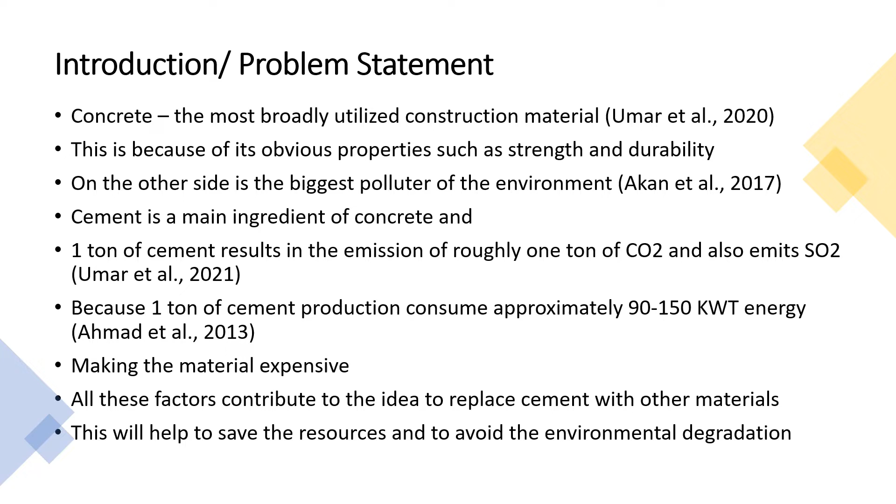And therefore, researchers are trying to investigate and adopt different alternative materials which could be not only environment friendly but can also reduce the cost of concrete. So if we look at the example of China and India, they are the world leading producers of cement, but at the same time they are also the leading environment polluters in the world.

Because the earth's population is increasing, the cement demand will double in the next 30 years. So if we adopt some supplementary cementitious material, we can not only meet our cement requirement, but we can also reduce energy and CO2 emissions, and we can thus protect our environment.

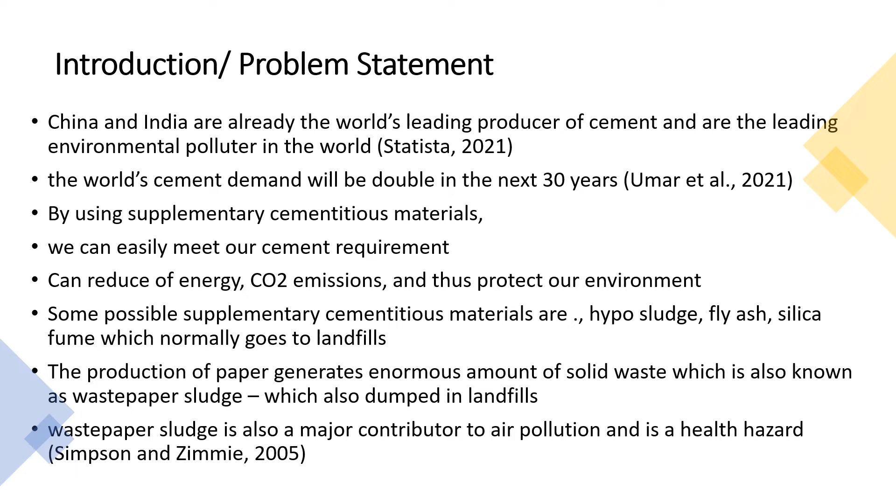There are several materials which have cementitious properties, and one of them is waste paper sludge. Waste paper sludge normally goes to landfill, and it is also recognized as one of the major contributors to air pollution. Paper sludge is classified as a class 2 liquid alternative fuel, and if it is burned, the fly ash has the same properties as Portland cement.

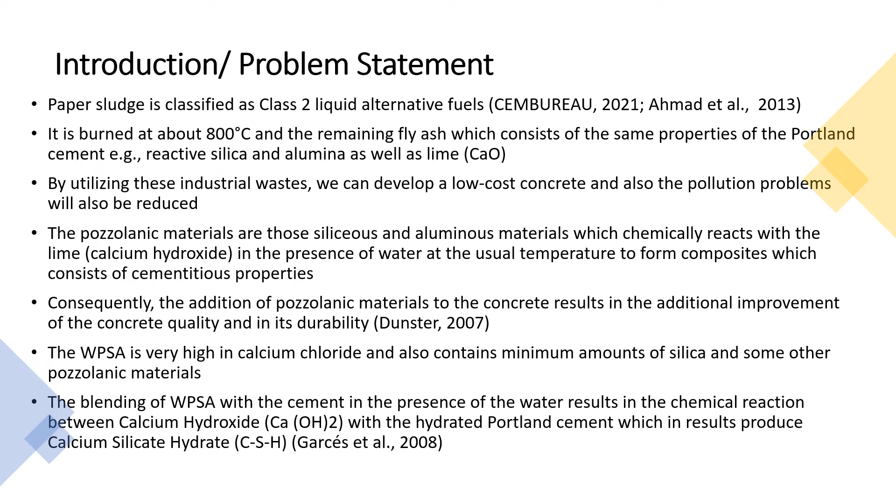And if we utilize this fly ash, we can produce low cost cement which can also be environment friendly. The reason for that is that the waste paper sludge ash is very high in calcium chloride and also contains a minimum amount of silica. So the blending of this ash with the cement in the presence of water results in a chemical reaction between calcium hydroxide and the hydrated Portland cement, which produces calcium silicate hydrate.

So we have used that ash powder in concrete to see its performance. M30 concrete was made with different percentages of paper waste, from 0 to 40%. Ordinary Portland cement was used in the experiment, and the waste material, the ash, was obtained from the University of South Wales. Here in the table, you can see the composition of the cement and the hypo sludge which we have used in our experiment.

For example, if I just look at the first item, the lime or calcium oxide: in cement we have 62%, and the waste material which we have used has 46.2%. So it's not quite equal, but roughly they have the same content.

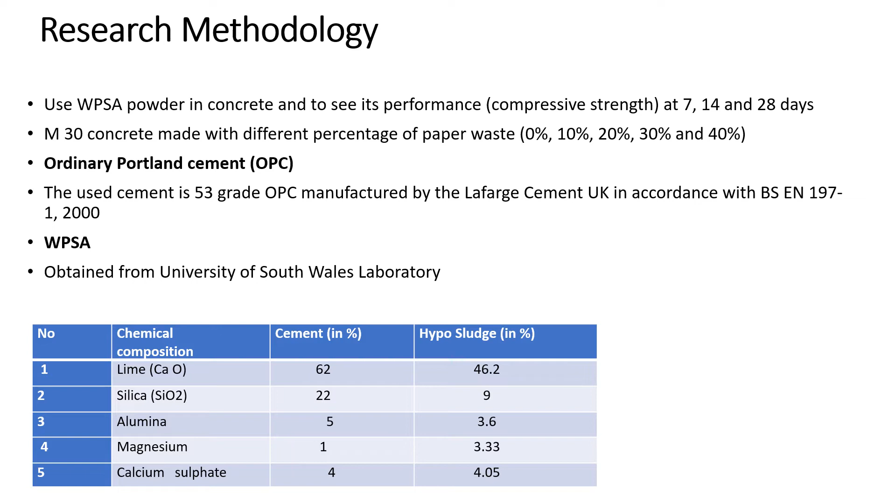So apart from using Portland cement and the waste paper ash, we have also used coarse aggregate, fine aggregate, and water, which are the normal ingredients for concrete. We have produced and tested 50 cubes of concrete, 10 cylinders, and 5 beams. And the focus of our laboratory tests was on compressive strength, split tensile strength, flexural strength, and water absorption.

The water cement ratio to produce the samples was 0.6, and the samples were placed in a water tank for curing for the required number of days.

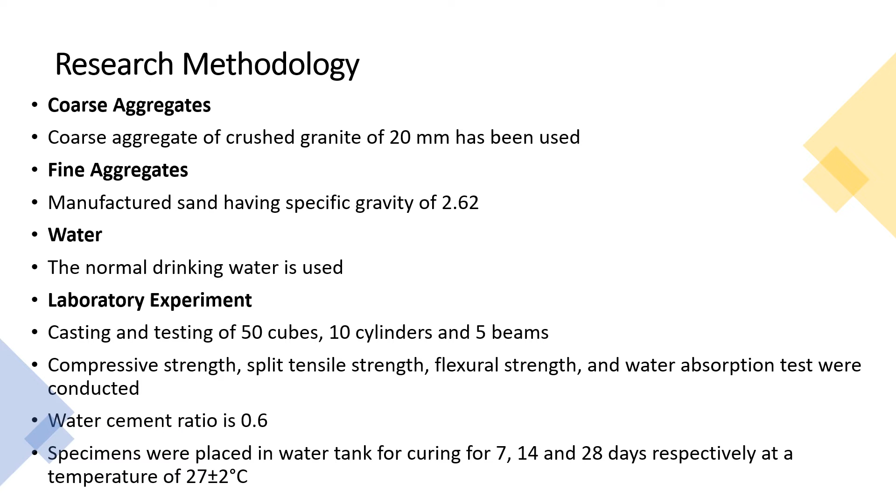Here is the detail of the samples which we have produced. So here you can see the description of the cubes, the 50 cubes, and the percentage of the waste material which we have used, the ash, and then the number of the cylinders which we have produced, and then the number of beams which we have produced with the different percentage of the waste material.

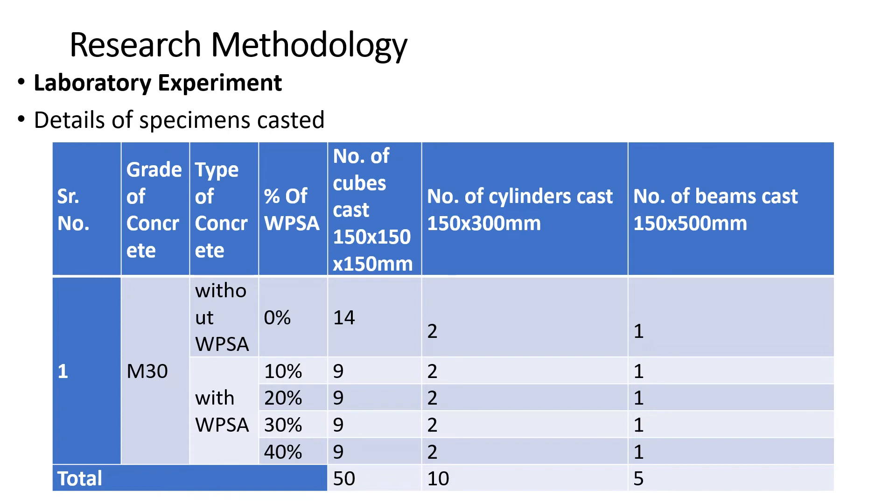15 cubes were tested after 7 days to check its compressive strength. The remaining cubes were tested after 14 and 28 days. For water absorption test, the samples were kept in the oven for 24 hours at 110 degrees centigrade.

And in the tables, you can see the mix proportion where you can see the ash percentage. The water cement ratio was the same for all the samples, and then you can see the cement, fine aggregate, the ash which we have used, the coarse aggregate, and we have also tested the slump values for that.

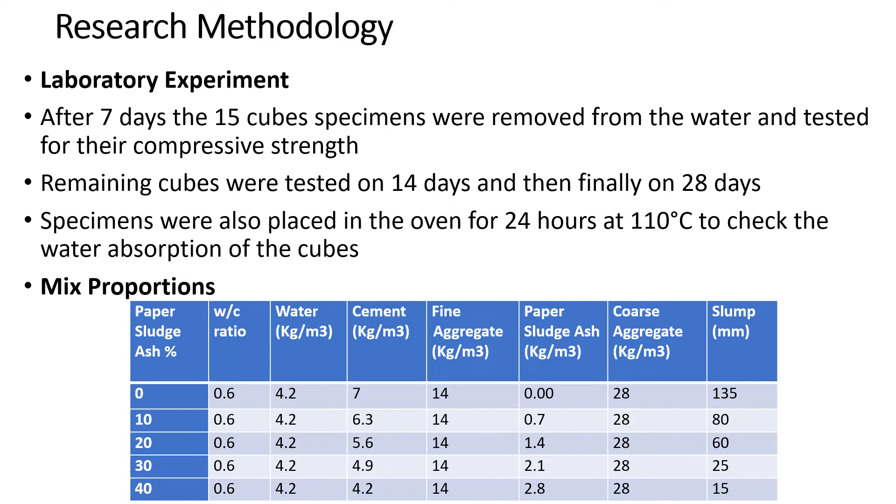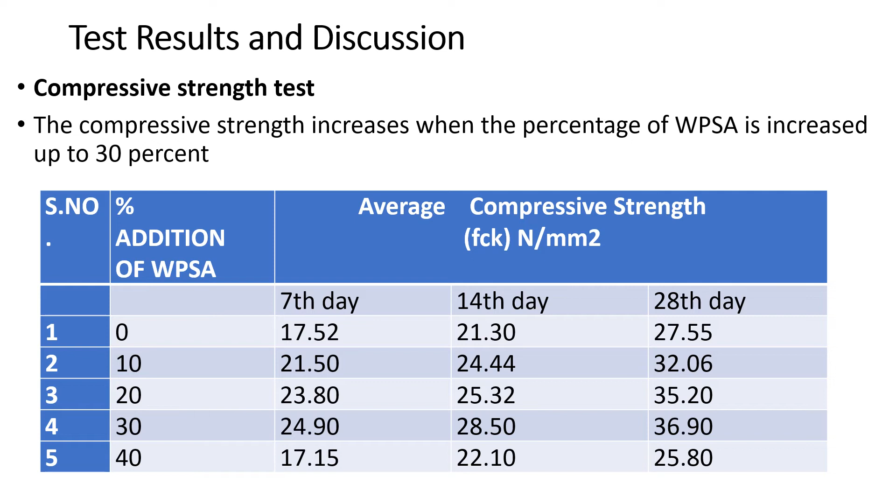So let's look at the test results, and the first one is the compressive strength. So as you can see in the table, the compressive strength basically increases when the percentage of the waste paper ash increases, but this increase is only up to 30%. If you increase the percentage of the ash more than 30%, then the compressive strength basically reduces. This is applicable on the strength on 7 days, 14 days, and also on the 28 days.

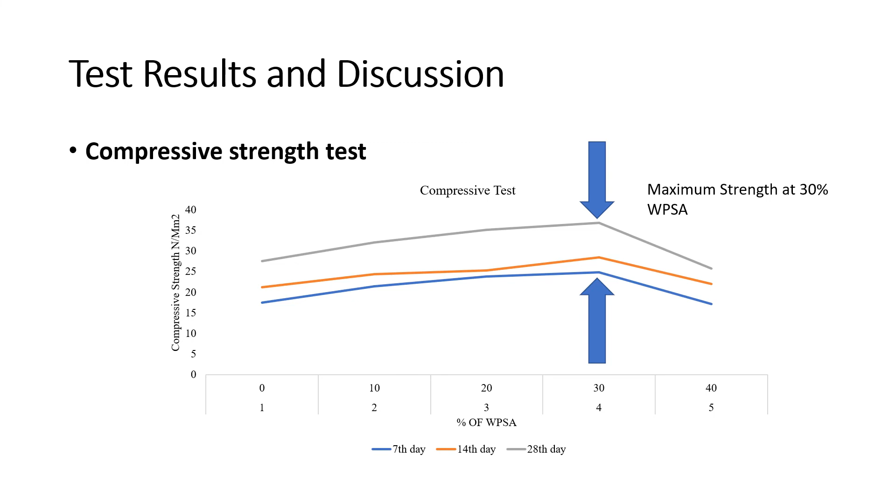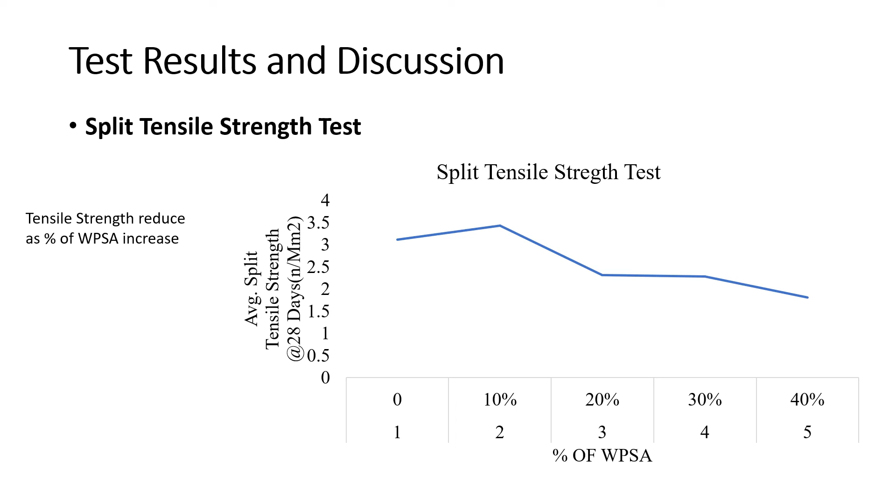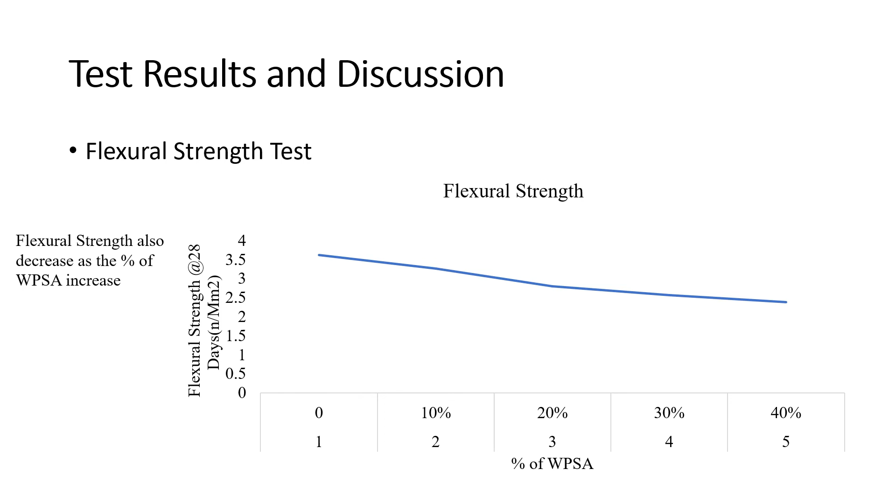The situation with the split tensile test is totally different from the compressive strength. So here from the graph, you can simply see that the tensile strength basically reduced when we increase the waste paper ash. The same thing happened with the flexural strength as well. So as we increase the waste paper ash, the strength basically reduces here as well.

In terms of the water absorption test, the results indicate that the water absorption increases as the percentage of the waste paper ash increases, but that is only up to 30%. When we increase more than 30%, then the water absorption basically reduces.

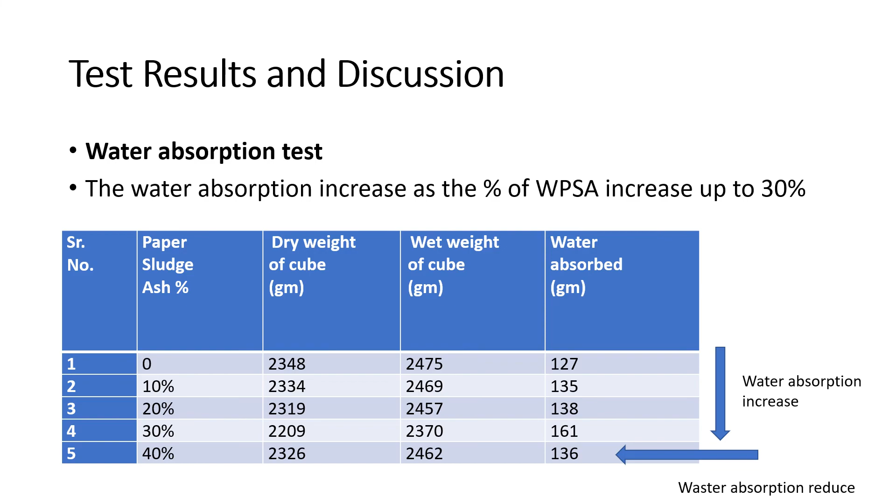So from this study, we conclude that waste paper sludge ash has a positive impact on the concrete compressive strength, but there is a negative impact on the split tensile strength and also on flexural strength. Water absorption also increases with the use of the waste paper sludge ash.

So clearly we can use the waste paper sludge ash where we encounter only compressive strength, and it can also help us to reduce the cost of the concrete and can also help us to reduce its environmental impact. Further experiments can be done by mixing waste paper sludge ash with some silica admixture. The use of gypsum, lime, and other materials can also be investigated, and the samples can be tested for a greater number of days.